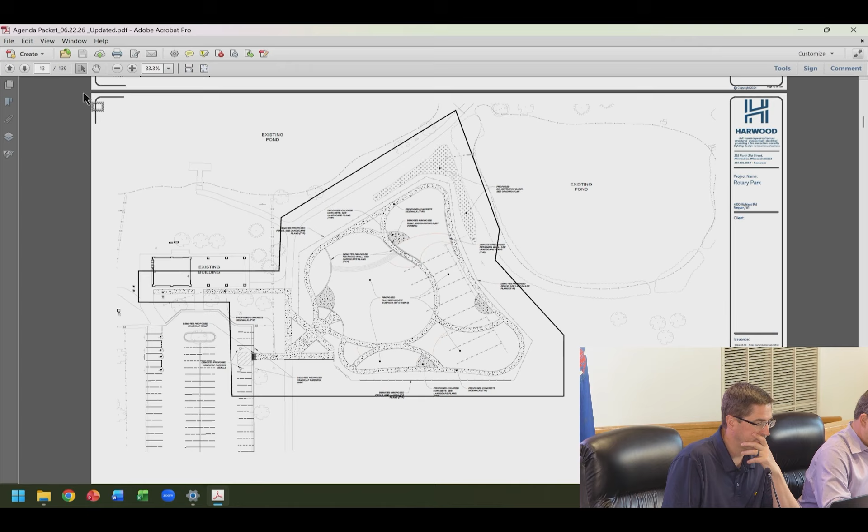Quick update from staff on what this item is about. This request is for conditional use grant and building and site plan approval to allow for an all-inclusive playground within Rotary Park. Our review specifically focuses on site design, overall circulation, and compatibility with the existing surrounding park features. The facility is designed around a central play structure, with surrounding accessible play elements throughout the site. There's also additional site improvements, including perimeter fencing, proposed at 6 feet in height, constructed of aluminum material, black in color. Staff is supportive of this and thinks it complements the site and design well.

The tallest play structure is 12 feet in height, consistent with other elements of the existing park environment. There are also slight improvements planned to the existing pavilion building, including renovating the men's and women's restroom facilities and adding a concessions area, all staying within the existing footprint. There's also a landscaping plan set forth, which staff is supportive of.

It should help soften the transition into the play equipment and the additional hardscaping planned with this project. The applicant was asked to revise the landscaping plan to show evergreen trees installed at a minimum height of 7 feet, and deciduous trees installed at a minimum caliper of 2.5 inches. That's standard for most of our landscaping plans. There will also be a future master sign plan that'll come forward for this project, which will be approved through the Planning Commission at a later date for donor recognition elements and other naming features throughout the playground. With all of that in mind, staff is recommending approval of the playground and the conditional use and building and site plan amendment.

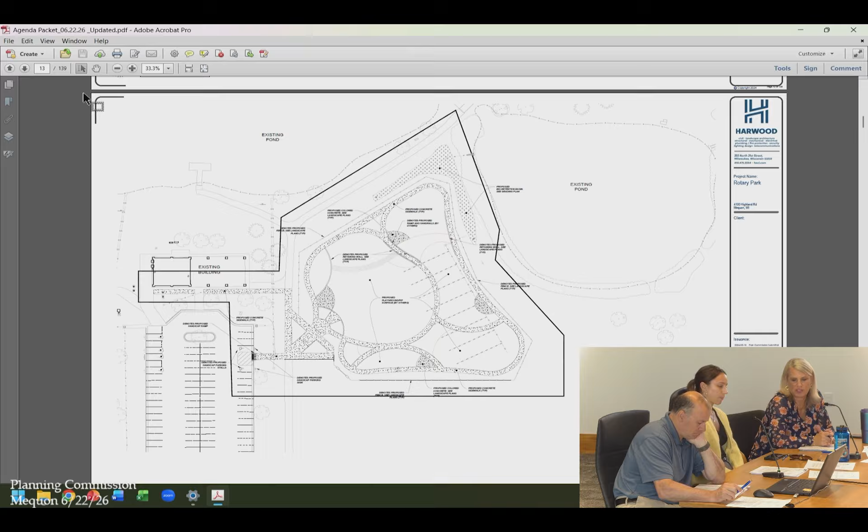Thank you. Any questions from any of the commissioners? Commissioner Barnes: Yeah, just two. I fully support the program. It's great that we have the Rotary here in the city providing these for us. What is, who will be providing the long-term maintenance that you referred to? Staff: I can answer that. It's not really part of this approval, but part of the fundraising effort includes a $500,000 endowment. So the council's already worried about that for us. We're just here to talk about the CUG and the site plan.

And then, as for the site plan, from my past work with Gathering on the Green, I recall several seasons where there was significant standing water in the area - nothing outlandish, but noteworthy. I was looking at the site plan, and it looks like the grading is done, but I want to call that to staff's attention so that when we see the fulfillment and construction of that, the grading aspects are really fully attended to. It's just been a sensitive area I've seen. Any other questions from any of the commissioners?

It's a wonderful plan. This is another step in a long process to get the project put through.

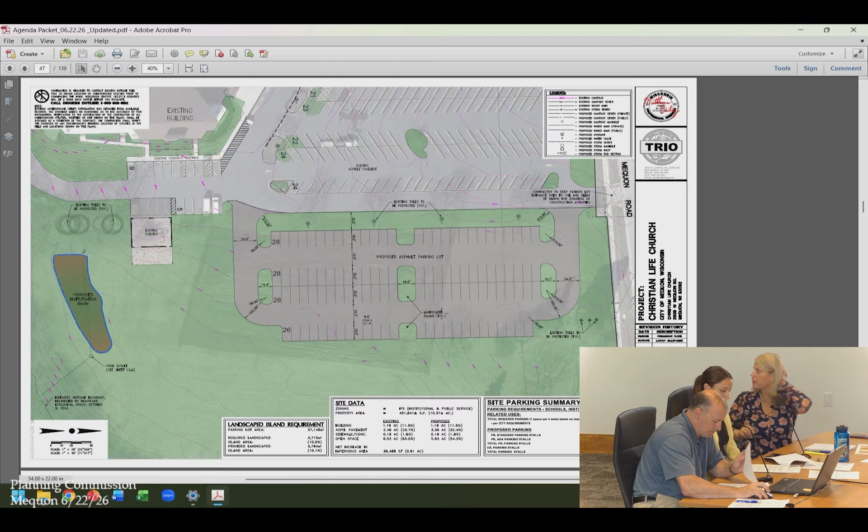All right, any questions from commissioners? Commissioner Schaefer: Can we talk about, kind of to the residents' point, can we talk about the landscaping plan? Because I think there are trees that are planned along Mequon Road. Yeah, I'll pull up the plan for you in a second here.

I had the same reaction where I thought, gosh, every time I drive by there—I admittedly do not drive by there regularly on Sunday morning and Wednesday evening—but there's always ample parking. However, I don't know that it's in my purview to say, no, you don't need this parking if they think they do, but I do agree that screening it appropriately seems like a reasonable ask.

So I do have the plan up on the screen. This is Mequon Road, and this is the existing parking lot. So this is all the landscaping along Mequon Road, and then it wraps around to the east and wraps the parking lot. I think there's a pretty good landscaping buffer there, and the house is still pretty far away from this parking lot. I'll also mention that there's no illumination proposed for the parking lot at this time, so there'll be no lights out there.

So the only lights you'll probably get is some headlights, but the landscaping over time should address any of those issues. And there's not landscaping along, or not much along the existing parking lot, so this would be more dense than what is out there now. Okay, thank you.

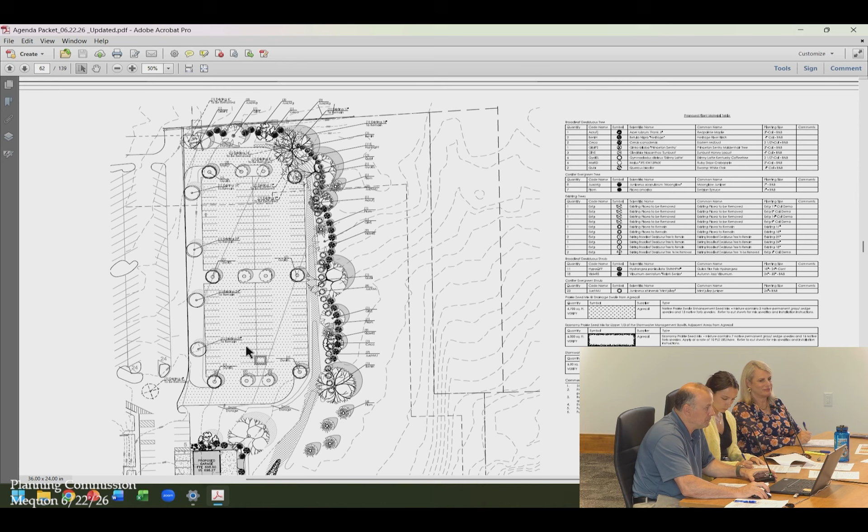Any other questions from the commissioners? Commissioner Chorn: I guess I have to admit too that the times I've driven past, there's so many open parking spots, but typically a parking lot for a church is often sized for the Christmas, the Easter, that event. So I guess I'd like to hear from the church what their thoughts and comments are with regards to the parking situation.

Go right ahead. My name is Ian Whitney, I'm with Groth Design Group Architects, working with Christian Life Church. Just a little context that maybe not everyone's aware of: there's a previous submittal. I think we were here about a year ago to approve the larger addition in the back of their existing building, which is kind of the impetus for this extra parking, since the seating count on a Sunday morning is dramatically increased. This was presented as part of that submittal a year ago as future parking. The church has just determined that they needed to attack this sooner than later.

Thank you for allowing me to be here tonight. I'm the lead pastor, my name is Joe Hanthorne, and our church did undertake the process. My name is Joe Hanthorne, I'm the lead pastor at Christian Life Church. It was about a year ago that we moved forward with this construction project.

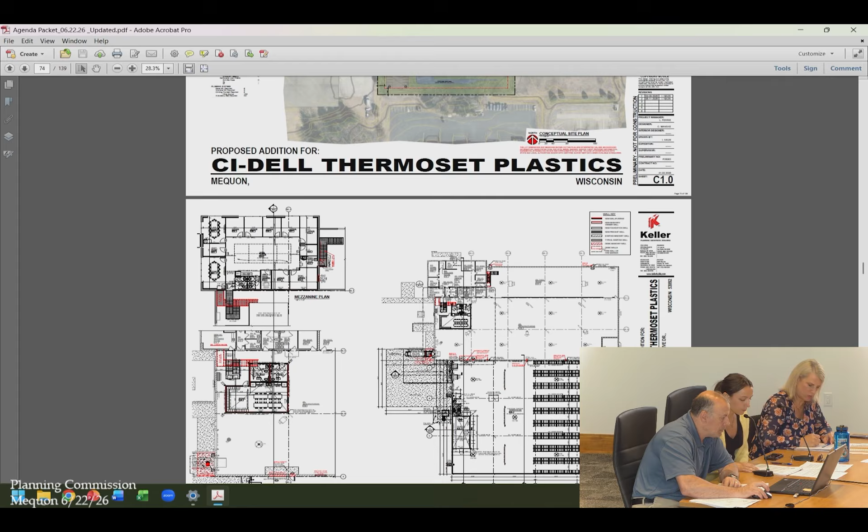This request is for a building and site plan amendment, intended to facilitate the growth of Ci-Dell Plastics' operations. The Planning Commission approved a similar site plan amendment back in 2023, solely for parking lot expansion—it didn't include the building expansion. Those improvements were approved at the time but were never constructed, and these plans now reflect the updated operational needs of the facility.

The site plan amendment includes a roughly 9,000 square foot expansion of the parking area and a 27,550 square foot addition. This is intended to accommodate the anticipated increase in employment—specifically, it should allow for 25 new employees, that's 5 office employees and 20 manufacturing employees across the shift schedule.

This plan proposes 26 additional parking stalls, which is 10 less than the 2023 approval that proposed 36. Despite that reduction, the supply will continue to serve the maximum staffing on site and similarly complies with zoning requirements. In terms of building design, the architectural materials and overall design are intended to complement the existing building and facility.

There are some improvements planned for the existing building as well, including re-roofing, re-caulking, paint finishes, etc. The applicant is also proposing to relocate a process chiller condensing unit from a ground-mounted location to the roof, as well as a new dust collector to be placed on a 15 by 15 slab to the west of the building addition and south of the existing building.

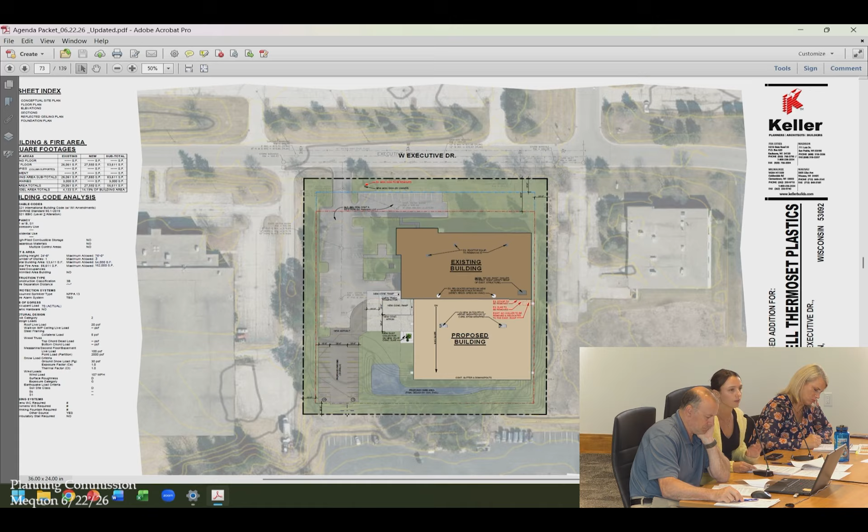There are 13 wall-mounted light fixtures proposed and 7 new parking lot light fixtures. One of the conditions within the staff report, condition 5, asked that the photometric plan be corrected to show property line illumination compliance. They have since sent an updated plan and show compliance with that, so that takes care of condition 5 as noted in the report.

In terms of site compliance, there's one existing parking lot light fixture that seems to be angled upward slightly, so staff is asking that it be corrected to angle downward and correct any spillover or glare onto other properties. With all of that in mind, staff is recommending approval of the building and site plan amendment.

Thank you. First of all, let me say I'm happy and excited that your business is doing well enough that you're willing to expand and reinvest in Mequon, so congratulations.

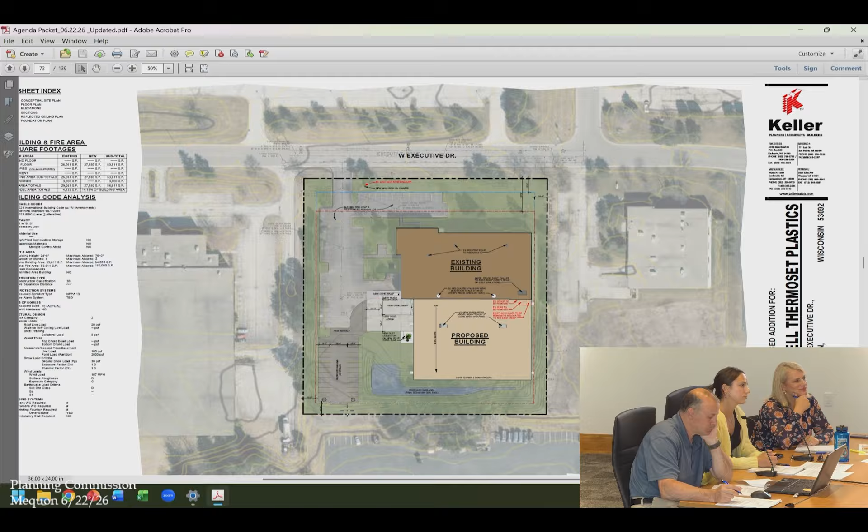Now with that out of the way, any questions from the commissioners, or a motion? I think they've done a good job of matching the proposed building to the existing, so I move for approval based on staff's comments. I'll second. Motion and a second.

Alderman Parrish: I agree, I'm going to be voting in favor of this. Are you in favor of all 12 conditions? Do these all work for you that are recommended as part of this motion? I'm Logan Ferry, here on behalf of Keller, here with Keller on behalf of Seidel.

Conditions 1, 2, 3, 7, 10, 11, and 12 seem acceptable. The line of sight exhibit we've already submitted, so we look forward to speaking further on that. Conditions 5 and 6 should be addressed. For number 8, we'll work with the civil engineer on the private hydrant. And number 9 is already in for review with MMSD, so no major concerns on our end.

Let's go. A motion, a second, and a third. Any other comments or questions? Hearing and seeing none, all those in favor please say aye. Aye. Aye. Any opposed? That item is approved. Thank you, congratulations.

Next is Thompson Project Management for FT Plaza LLC. The applicant is seeking a building and site plan approval for a 3-story mixed-use office building for the property located at 11030 North Weston Drive, Foxtown Building E3.

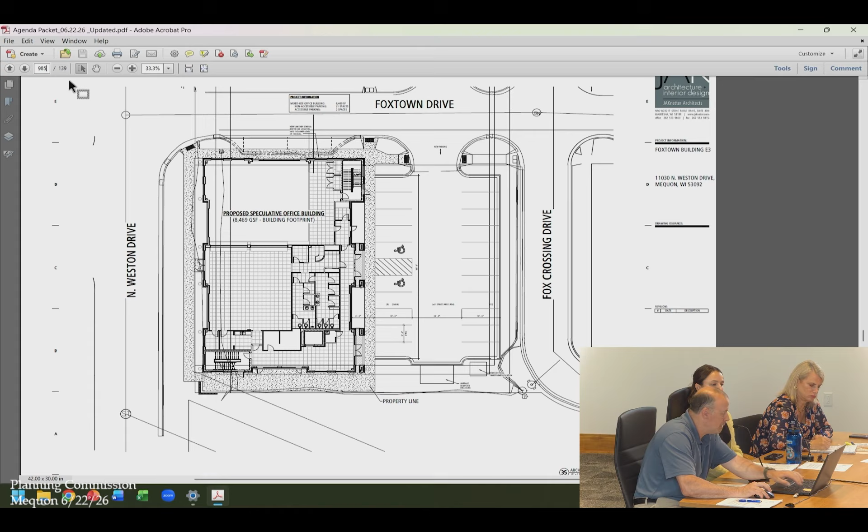In terms of the building changes, there are a couple of minor changes. I'll pull up the elevations on the screen. Let's see, let's just go down. There's a couple changes related to...

The pickleball court is no longer a viable option, it sounds like, so they're changing the floor plan to allow for a dance studio and a fitness center. Based on that, they need to add 2 egress doors, which will be on the north side of the building.

There are also changes made to the greenhouse—if you recall, there was a greenhouse shown on the 4th floor. That has been eliminated due to code issues related to structural concerns with the building. So they eliminated the greenhouse, which actually reduces the overall height of the building by roughly 6 feet. They also eliminated elevator access to the top floors, but there is stairway access.

So you can kind of see on the plan, there's 2 gabled stairway enclosures that go up to the roof of the building. So that's a minor change as well.

Overall, staff is supportive of all these changes. They're relatively minor in nature. We did make a note that dance studios are limited to 2,000 square feet and sports fitness studios are limited to 3,000 square feet. Right now, it shows that the dance studio is a little bit above that, so they either have to reduce that or ask for a text amendment to increase the size if they wanted to go forward with a larger studio. So relatively minor stuff, and we're recommending approval according to the conditions in the report.

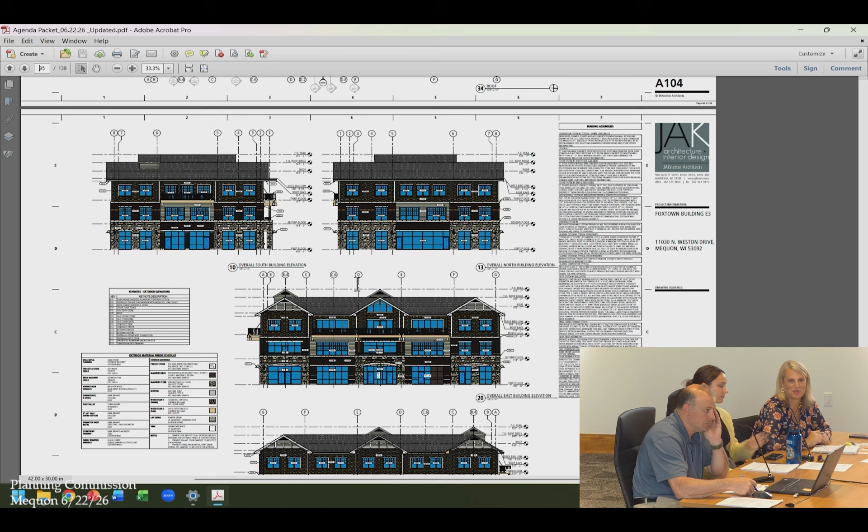Thank you for the overview, Jack. Any questions from the commissioners? Another great looking building in the Foxtown development. Any questions, concerns, comments?

Commissioner Jordan: I have to compliment you again. Every one of those buildings is well done. The materials are great, the look is great, construction is great. So I have no issues with this. I'm glad Jack pointed out those 2 extensions for the stair tower. I was struggling to find out where that was, but I now realize why they are there.

I'm moving for approval based on staff's comments. I will second that. Motion and a second. Any more comments? Hearing and seeing none, let's call the roll just to mix it up, keep staff on their toes.

Commissioner Barnes, yes. Commissioner Chorin, aye. Commissioner Abadi, aye. Commissioner Schaefer, aye. Alderman Parrish, aye. Mayor Nurbin, aye. Vote passes. Congratulations, looking forward to seeing it go in.

Thank you very much. And now we're on to our last item this evening. Miller Marriott Construction. No, did I skip one? Oh, I really want this meeting to be done, I guess. Okay, thanks for keeping me honest, Commissioner Schaefer.

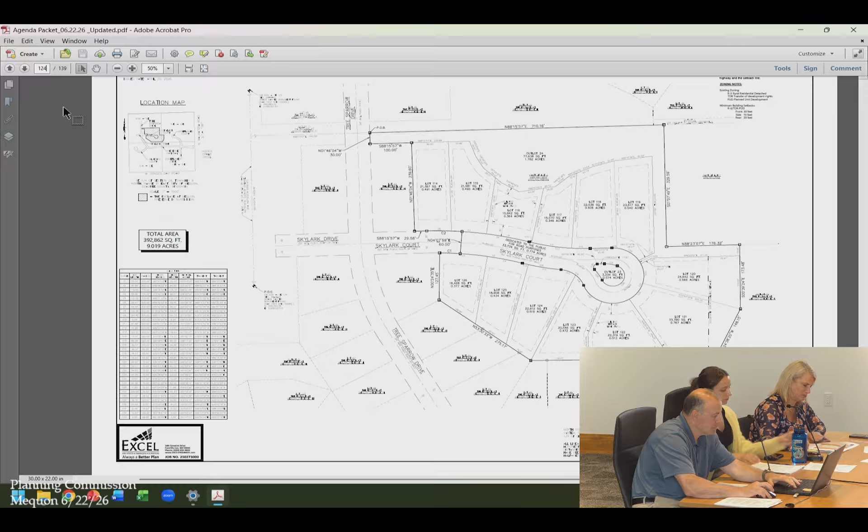Thank you. Any questions from any of the commissioners? Well, if there's no questions, we can always make a motion. I would move approval as per staff's conditions. Second. Motion and a second. Fantastic, last chance on comments and questions. Hearing and seeing none, all those in favor, please say aye. Aye. Any opposed? That too is approved.

Congratulations. Now for our last item this evening. Wait, is that the final? Is this the end? No, it's not the end. No, all right, see you. It just looks like it, because this area, you're putting that one puzzle piece in, but there's other puzzle pieces. Okay. More to follow, I'm sure.

Last item this evening, Miller Marriott Construction Company LLC. The applicant is seeking concept plan and rezoning recommendation approval from B5, R1, R2B, C2, OA to R4 PUD and C2 zoning for a residential neighborhood consisting of 87 single-family lots on 107 acres, for the property located just south of 10303 Baehr Road and north and west of 10007 Baehr Road.

We have two people who registered to speak, so before we go into staff, maybe there's a couple more. Okay, sounds good. The first is Mark Hilgendorf, who opposes and wishes to speak. 11521 West Mequon Road. Yes, I also own the land south of that project, a farm.

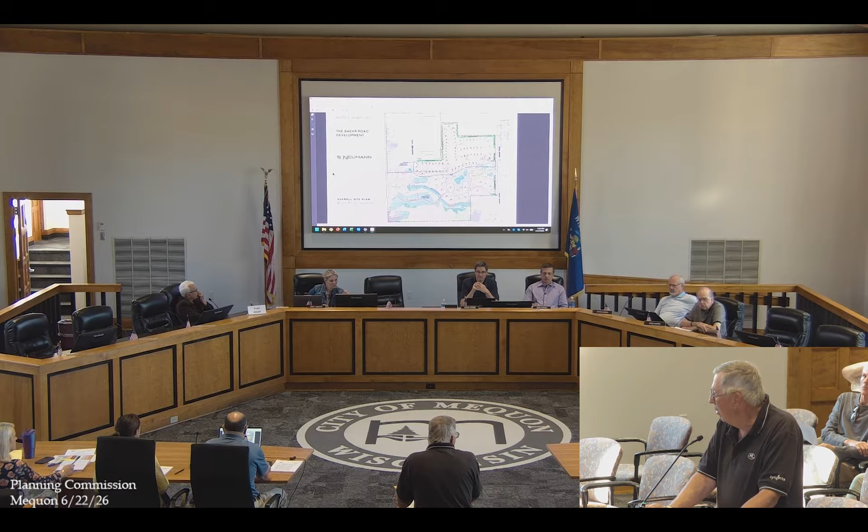If you keep the same elevation that it is now, those houses will be underwater, unless you're gonna put it on somebody else's property, which I'm sure they don't care about because they're in and out anyway—they're not residents. So, thank you.

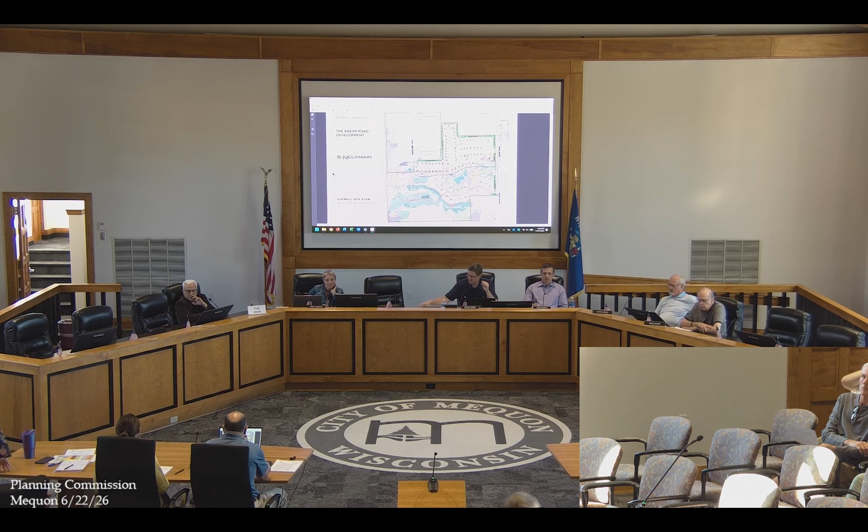10258 North Baehr Road. My property is just to the east of this proposal, and I bought the property because of the rural nature of the road. When somebody asks where do you live, and I say Mequon, but not the subdivision Mequon, rural Mequon, that is very important to me. We pay a cost for living on a rural road—we have our own well, our own septic, and we've done that. I've been there 25 years now.

That's fine, I appreciate it. I think Mequon has enough subdivisions, and I have not seen this plan before, but it looks like if you wanted to put houses to the west but leave Baehr Road basically as it is, that would enhance the city of Mequon. That's my view.

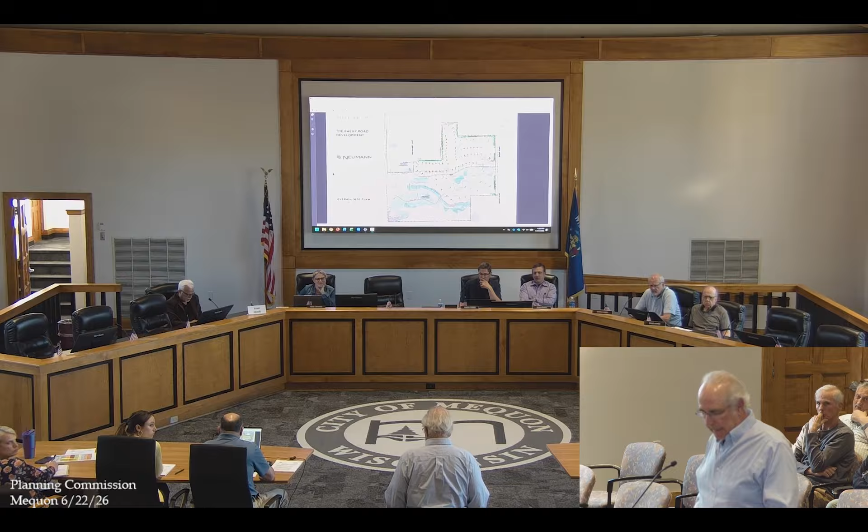Back in the late 90s, there were a series of meetings held. There was a subcommittee to explore the stormwater issues as well as the uses of the property. Most of the neighbors, virtually all of the neighbors along Baehr Road at that time in the late 90s, expressed an interest that the property would not be developed for industrial, and it would be used for residential.

If you want this as part of the record, I'm sure there's records of that at City Hall. Also, maybe Jack Zader could address this, but a lot of the water is coming from when we get the plus 100-year floods from the Milwaukee River. But the neighbors were talking about the ponds overflowing. The ponds on the property are pretty much midway down Baehr Road. Those are temporary structures, built when we were doing some grading, prepping the site for sediment basins for the construction activity. That was not a permanent solution. It was not designed for the eventual, ultimate use of the property. So I want to point that out. Also, there's some inadequate culverts that back up the water.

Recently, last summer, the city did improve Baehr Road. That elevation probably took up the road grade a little bit, and that should help with some of the water draining, but also with the improvements, I'll have Miller Marriott and Neumann address their plans. So again, as a resident, I support this development, but we also have a vested interest in Mequon. I've lived here virtually all my life. I have brothers and sisters who are also property owners in support of this. Appreciate your consideration. Thank you.

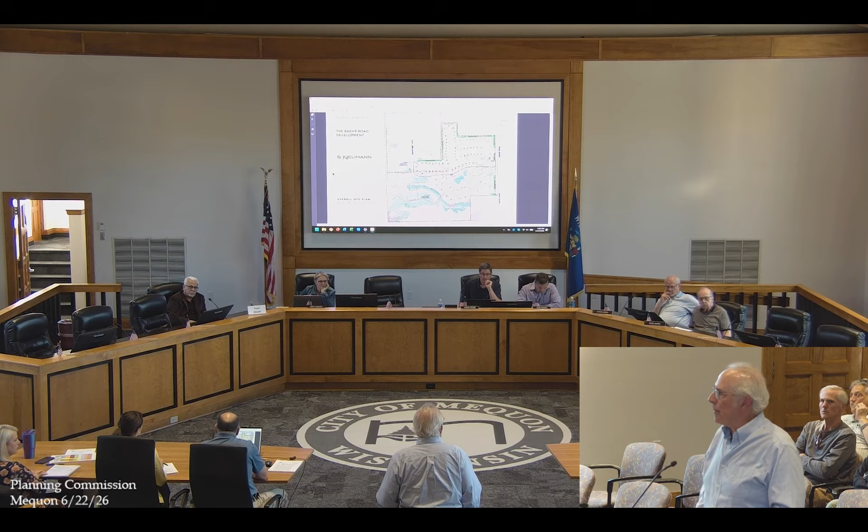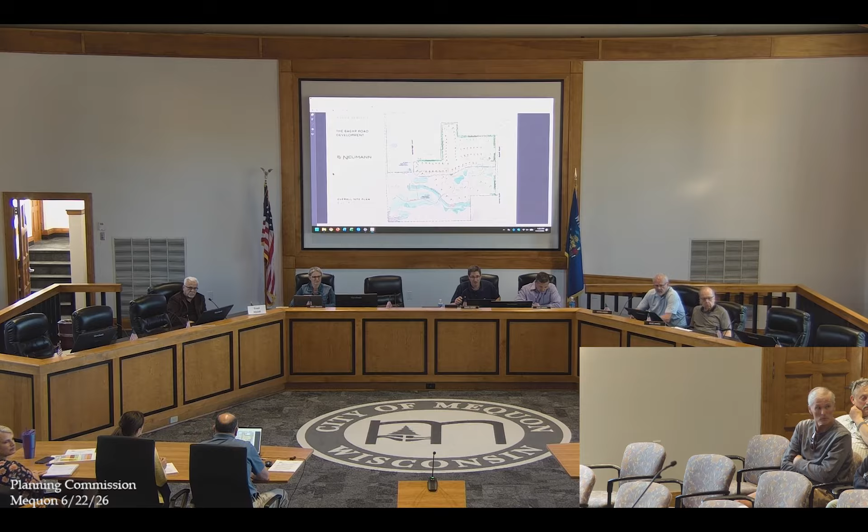Thank you. Is there anyone else here who wishes to speak while we're entertaining public comment? One more comment? I think she spoke already. I did. Okay, we usually say one and done, but if we keep it quick, let's have it. Please step up to the mic though, so it's recorded.

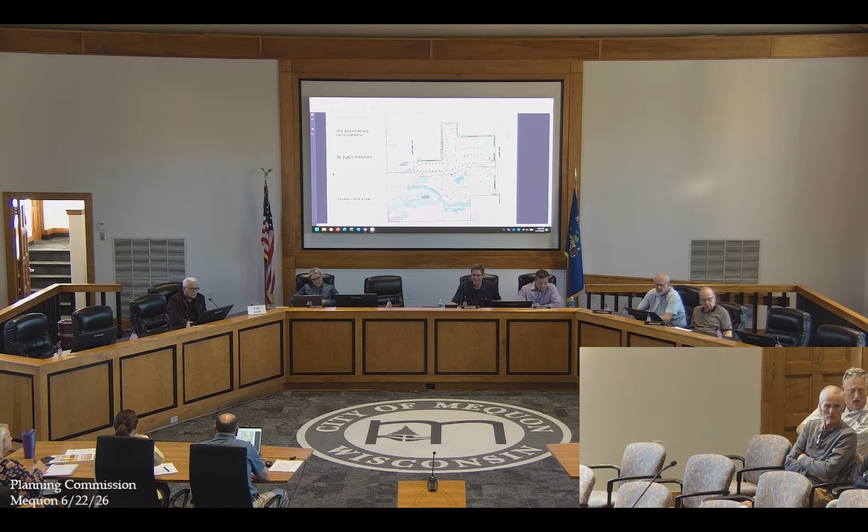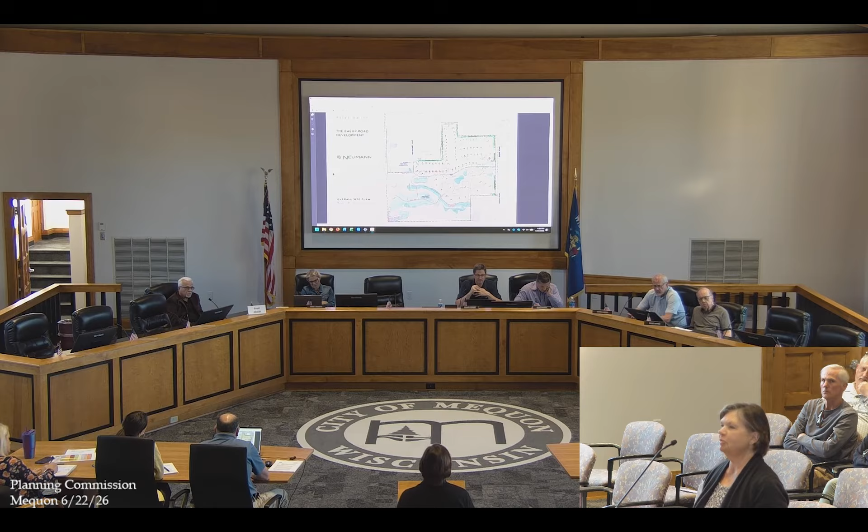It's the number of trees that will have to be cut down, bulldozed. There are trees here. You should see all the beautiful mature trees in that area. It's a crime.

All right, I think we're done with public comment now. I don't see anyone raise their hand. Okay, let's get into the staff report, and then we'll open up for questions.

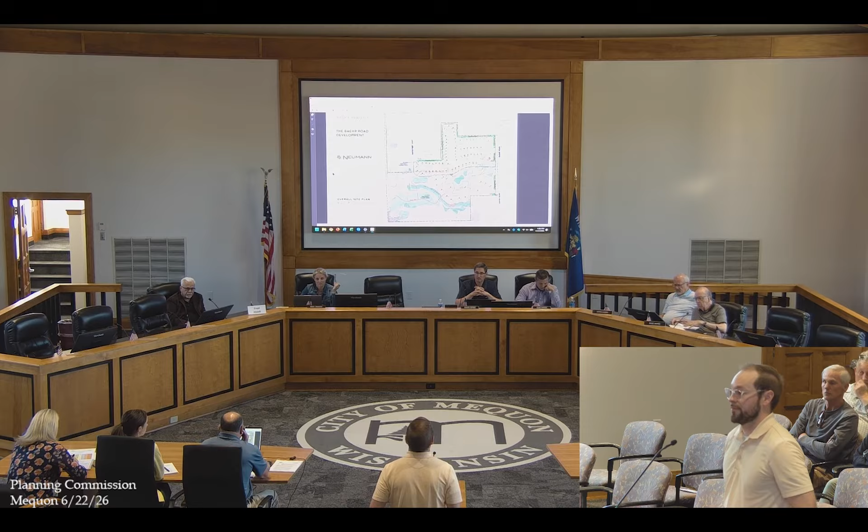Sure, I'll let Cole address any specifics to the drainage, but I guess I'll start off by saying this is, in its simplest terms, a question of whether it should be industrial use or residential use. Most of this is currently zoned B5 industrial. So it's not a matter of getting it developed, it's a matter of what type of development we want to see here. We've been dealing with this, I've been here 20 years.

I've dealt with numerous proposals that Tom talked about on the site, mostly residential, some non-residential, but it's a tough site, and there's a number of reasons why. Number one, it's currently served largely by a private lift station that goes down Enterprise Drive. Another issue is that the southern half of this is not in the sewer area, while the north half is. So it's bifurcated by the sewers. There's also, as people mentioned, wetlands, floodplain, and some specimen trees on the site. There's a lot of environmental issues on the site as well.

So the question the commission has to respond to is: is it more likely to be developed, or better developed, as residential or industrial? Because whether it's industrial or residential, they all have to meet the same stormwater requirements. Cole can get into that in more detail if you need.

We've had numerous discussions and proposals about this site. Most recently, in March, the same proposal was in front of the Common Council for a consultation. The Common Council overall supported the use of residential, with some qualifiers. 6 out of 9 members supported lots between 10,000 and 13,000 square feet on the north piece. 6 out of 9 voted in favor of the city maintaining that lift station, and 7 out of 9 were in favor of requiring 2 entry points for the subdivision. Currently, the subdivision has 1 entry point for the north piece and 1 for the south piece, with an emergency connection between the two and an emergency connection from the north piece to Enterprise Drive.

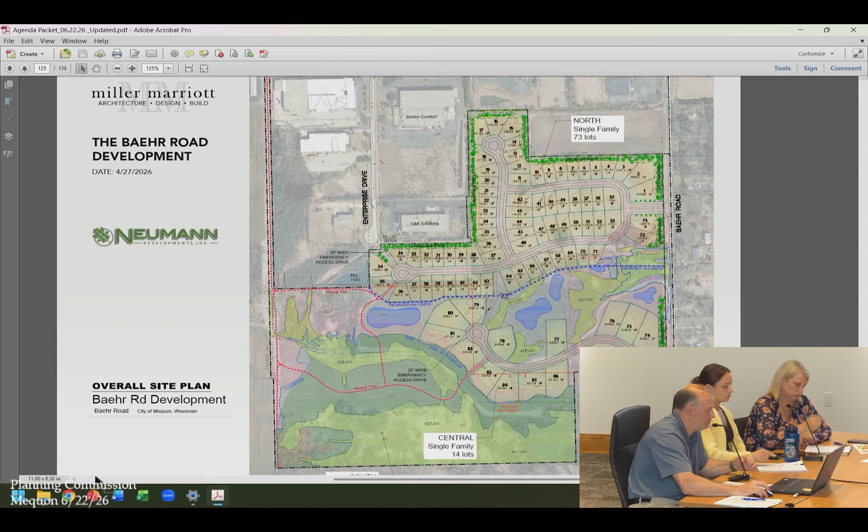Thank you. Thanks, Jack. Do you know offhand if it was developed as industrial, how many square feet would be allowed? No, but I can calculate that relatively quick if you need an estimate, I just have to pull up my map. Maybe Cole would like to address some of the drainage concerns, if the engineers could take that on. Sure, I could go over that quick.

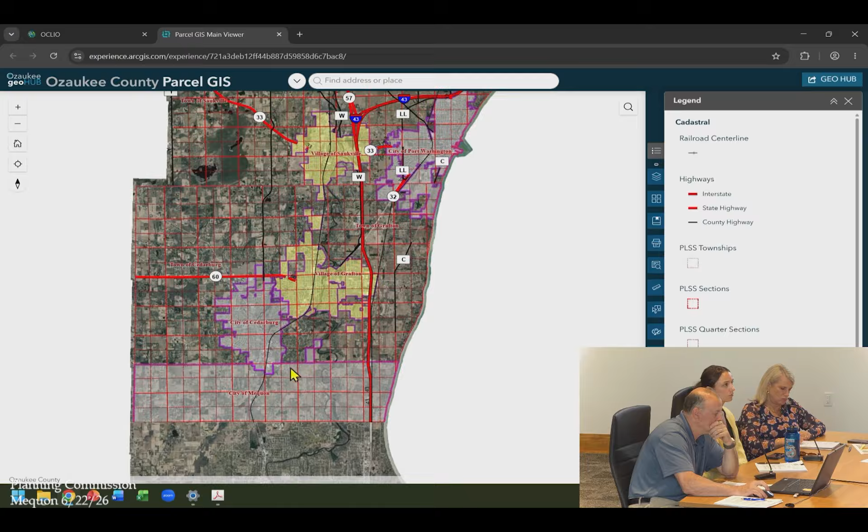A couple easy things. First, there were concerns about endangered resources, whether that's trees or other animals, like bald eagles. DNR will screen for that when the applicant applies for their stormwater and grading permit through the DNR, and they would have to take any mitigation measures for those types of things.

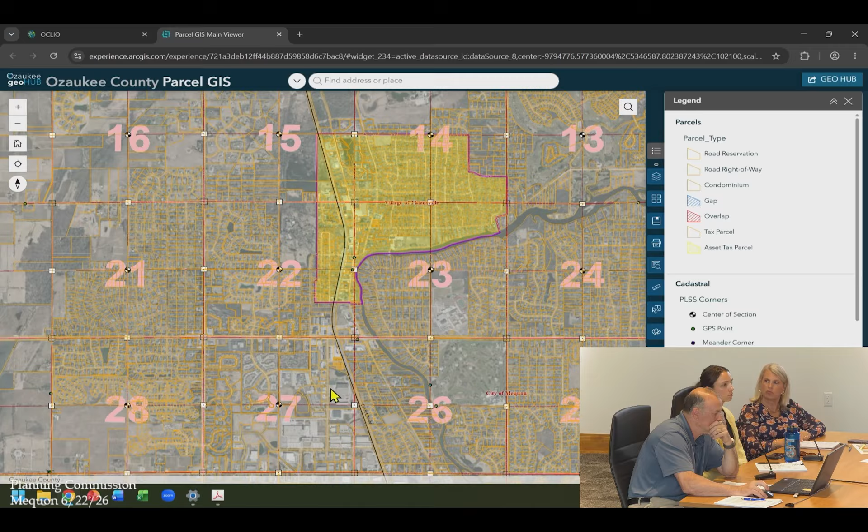There were a couple mentions about floodplain filling. We're not aware of any floodplain filling that's proposed. It's pretty hard to obtain, but we're at least not aware of any at this time, and the maps didn't look like they were proposing any in those areas.

And then regarding stormwater and flooding, we go through this in a lot of developments. We have a couple different levels of regulatory restrictions on stormwater and how it has to be controlled—DNR, MMSD in this area, and our city ordinance. Those all have different regulations, but basically you need to discharge less flow at a lesser rate than what it was before the development occurred.

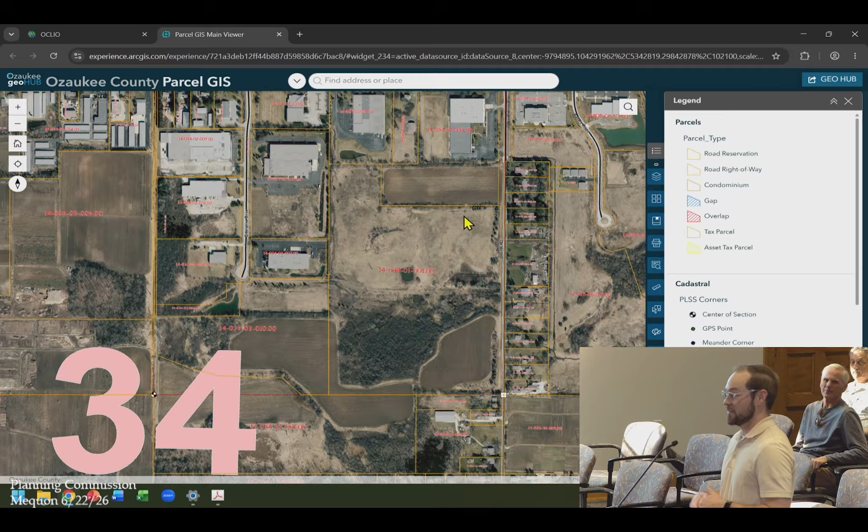That's the reason why these ponds fill up with water when you see rain events. It's obviously the reason when you see big rain events like last August that was mentioned—you'll see overflows, you'll see water in those ponds, because that's where it's supposed to be. It's holding back that water, that volume, and then releasing it slowly over time. The city has a more restrictive stormwater ordinance than both DNR and MMSD; it actually requires the developer to bring the flow rates back to as if this site was basically like a forest. So I just thought I'd add those pieces in, but happy to answer any other questions.

Commissioner Schaefer: Cole, can you go back to the part about trees, wildlife, et cetera? I don't know that I've heard this before. So if the DNR does some sort of screen, and if things are found within whatever scope they have, then what? Can you explain it?

If you're disturbing a certain amount of acreage, you have to do endangered resources screening on your property. That's basically telling DNR where your project is, and they have a database mapped of where endangered resources have been encountered. Depending on what you're encountering, you have to take certain measures—like you might only be able to touch certain trees. One example we encounter on our projects is bats inhabiting certain trees at certain times of the year. Nate would know those dates off the top of his head. There are times you can only take down trees; the dates are restricted to avoid breeding or nesting season. Same with bald eagles—we actually encountered that on one of our projects recently, and had to take certain mitigation measures for that as well.

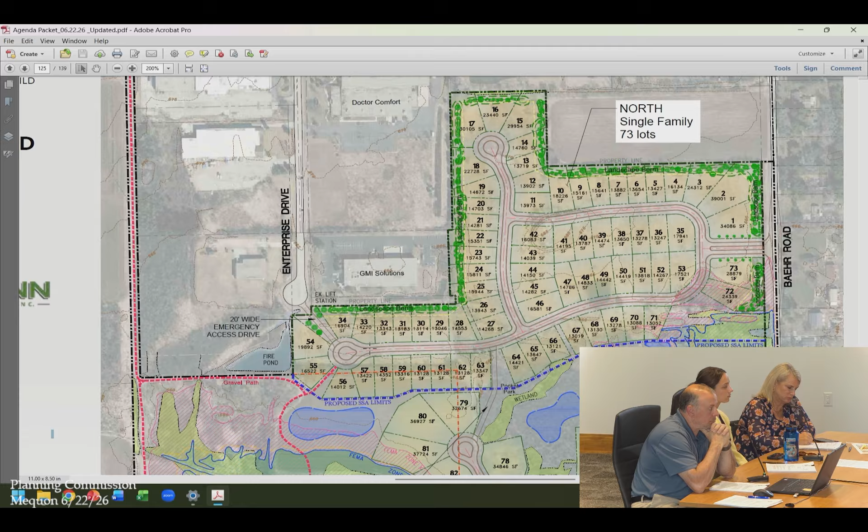Commissioner Abadi: Did I hear this correctly, that the fire department has not seen or commented on access? We invite them to all our meetings. They don't necessarily show up to most of them, so I don't know if they've seen it, but they haven't made any comments on it at this point. It's really not a typical fire department comment time frame for them. If it's built to our specs, it usually isn't an issue. They'll comment more on industrial uses or where there's fire lane requirements. But for residential, if it meets our city requirements in terms of cul-de-sac size and street widths, they normally don't have a concern with that.

No, the issue is only one access to a major road. If you don't have those emergency access points, then potentially the fire department could have issues. Yeah, typically in the past they haven't really made comments on those issues in the years I've been here, so it's a legitimate comment, but we haven't heard it. They'll look particularly close when roads aren't built to standard specs, but standard specs are meant to accommodate the turning movements of the vehicles. You're right about the emergency access, but that's maybe why it's being contemplated. If you had a significant event towards the entrance of the subdivision, you could choke off the whole subdivision very easily.

In communities I've served, the fire department would strongly object to one access point to a major road. Yeah, I mean, I think that makes sense. Typically when I spoke to the fire chief in the past, he says if I need to get there, I'll get there some way or another. But the northern piece will also have hydrants at certain locations. So again, our recommendation is to have two full access points, either a connection between the two or two off Baehr Road. So I think even if they don't support it, we're supporting it in terms of connectivity and development.

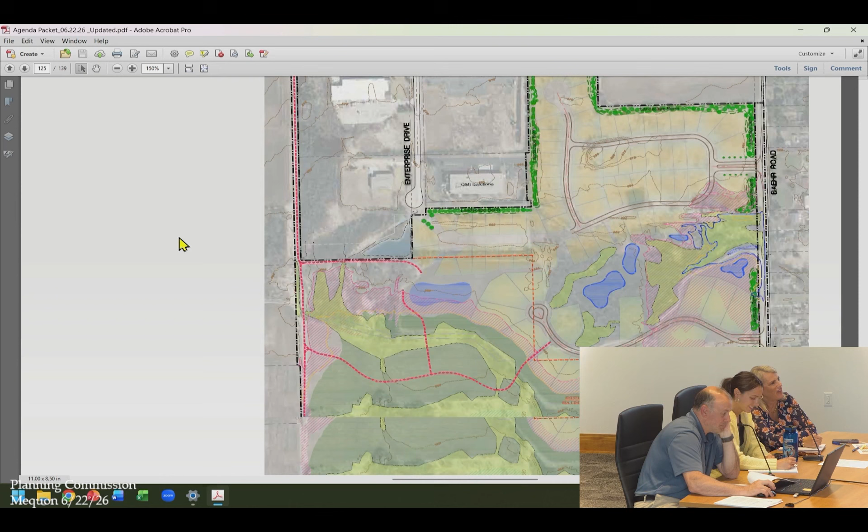Every time I zoom in it jumps to a previous page for some reason, I'm not sure why. But yeah, it's just really close, and you know those residents are going to start complaining about the truck traffic and the lights -- it's just so predictable what will happen. So let's just design an extra buffer there. There should definitely be another 10 to 20 feet of some kind. I like the landscaping and the trees buffer that you have there.

Honestly, if you have an exit proposed on Enterprise Drive, I'll vehemently oppose it. Council, think about land use, think about home values. I'm not speaking to anyone directly, just hypothetically—someone living in lot 34 doesn't want a business park road going right past their house into a nice subdivision. It doesn't make any sense.

So the solution there is just to connect them. That's what it needs to be when you come back. But in general, I think the ship has sailed—we need to help them get some density here to make it viable.

Other developments proposed here over the years were dense, multifamily, and other mixed uses, like some form of senior housing and townhomes. Out of all the plans I've seen over the years, thank you to the property owner and both developers for trying to make this work. I get you're trying to keep the development separate, but we're working with you, so you've got to work with us. We want something to happen here. We're bringing a whole other section of Mequon Industrial online, so this can happen, and we expect some level of compromise, respectfully.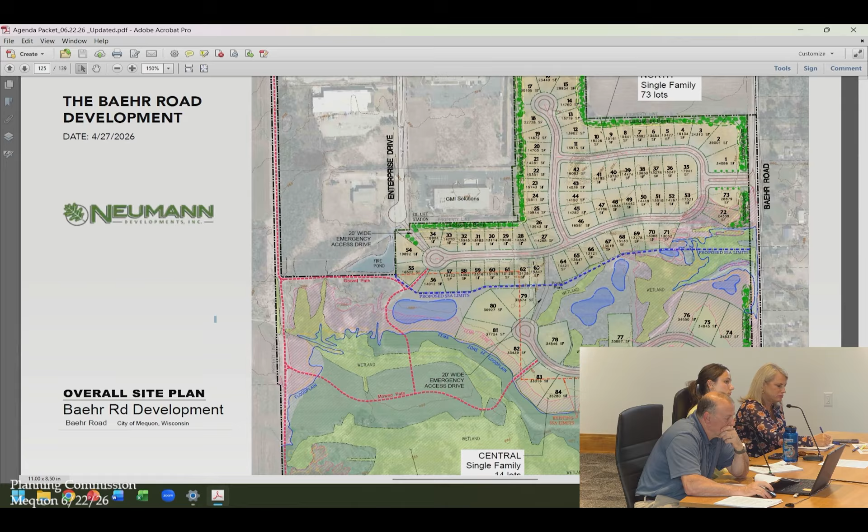There's just a lot of trade-offs. It's a hard site with all the protected features, and if we're going to help make this work, I get we need some compromise here. Thank you again for all the time and effort, and if you have anything to add for our consideration, we'd love to hear it as well. Thank you.

I don't see any other questions from the mayor. Would you like me to talk, or do you? The applicant wants to have a few words. It's certainly appropriate to do so.

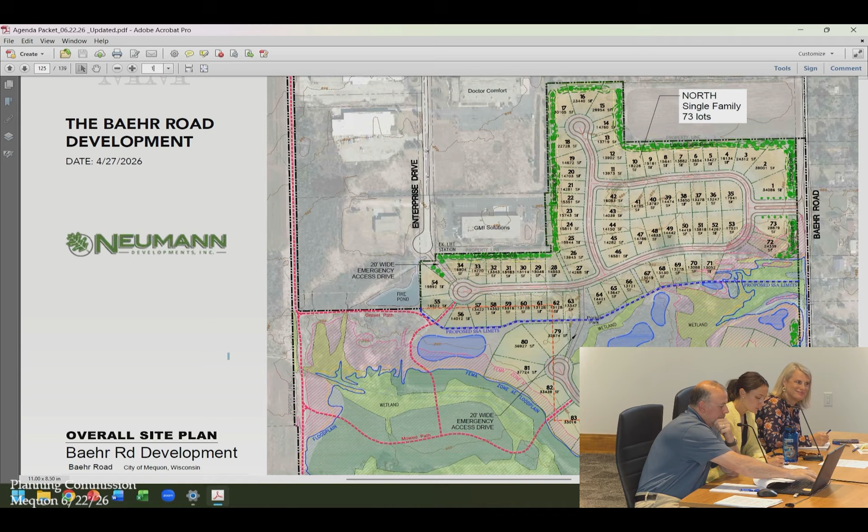I'm Chris Miller with Miller Marriott Construction. Brian Lindgren, Neumann Developments. I'll speak a little bit conceptually on the whole thing and talk about the southern portion, which is really where our eyeball's at, meaning that's where we're looking to build our homes. I'll let Brian address some of the northern stuff.

I want the Plan Commission to understand that I look at this as a development as Miller Marriott. On the northern part, I've asked Neumann to partner with me because it's a better fit for them. But I hear everything that's being said—it's a tricky site. Honestly, it's what we do at Miller Marriott.

We do infill subdivisions, so a lot of the conversations in this room—the residents concerned about water, the noise—we've been down this path before, and they're all good concerns that need to be addressed. We will continue to address them with staff as they come up. What we're really asking for is approval conceptually so we can get into those details.

A couple of things I want to talk about: it's next to an industrial park, which makes it tricky. Part of this is having transparency with customers, so as we go down this path, they clearly know what they're buying, and that helps everybody involved. We had a situation doing an infill next to a military academy where, literally in the buy agreement, we had to let them know there can be cannons going off and have them acknowledge it—if you don't want a cannon going off at roll call, this is the wrong subdivision for you. So transparency is everything in stuff like this.

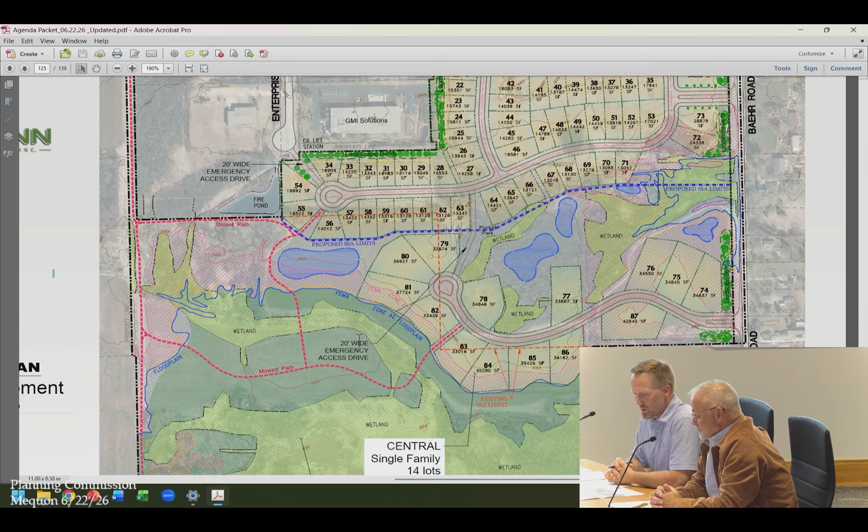In terms of the buffer area, I'm not saying anything I haven't said in this room before, that I don't love the 30-foot buffer. I think there are a lot of ways to address that are appropriate. Landscape and preservation easements can serve the same purpose and give a homeowners association the necessary enforcement mechanism it needs. Even whether it's on an individual lot or not, we can dictate plantings and preservation methods and what happens when it's mistreated, and intervene as necessary.

With that, I think we're looking for some direction. We've heard that the emergency access is not preferred - we can make a permanent connection. I think the rest of the conditions as listed are things that we can work with. But I do want to ask again that you consider that these preservation areas can be done with other methods than putting it in an outlot that frankly isn't really accessible to anybody other than the homeowner that is right there.

I do want to add one thing to what Brian said. I've seen this go both ways. I've seen HOAs actually go defunct, and they're hard to manage, and homeowners are better at this because they care about their own lot. It could be done via easement - the 30-foot buffer could be done with an easement, and they have to maintain it a certain way. Homeowners are going to make that happen. I've also seen homeowners go a little rogue, and HOAs have to step in.

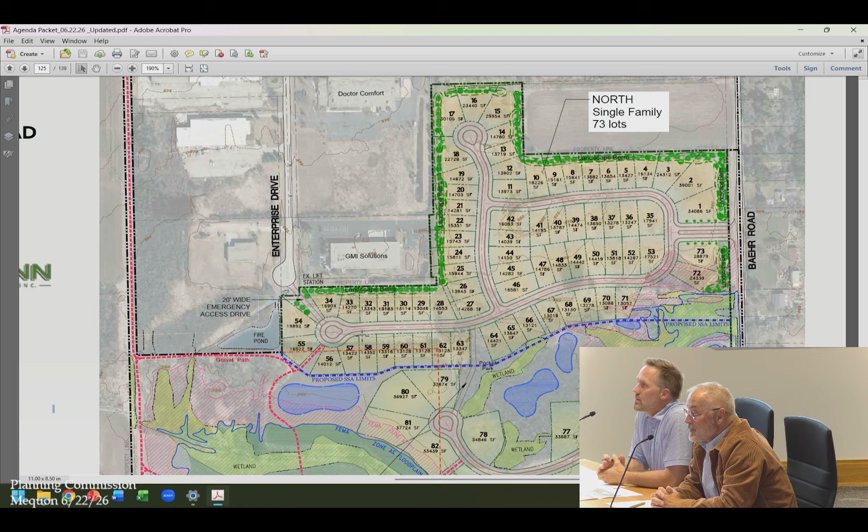What I mean is, I'm okay with both of these developments. I'm okay with rezoning it based on what I'm seeing here, generally speaking, and the developers we have. But say one of these developers is no longer part of this proposed development, gets swapped out, or the deal doesn't happen, and an all-new developer gets brought in. I rezoned it because of what I'm seeing here. So do we need to modify the language so the rezone is contingent on the development actually happening?

Are you saying you prefer the concept plan or you prefer the developer? That's two different questions. Because if it's just a concept plan, I'm worried about rezoning the property — one of these developers goes away and then it's too late, it's already rezoned. I'd prefer it just stay industrial. So for me it's really important what we're compromising on when we do rezone this.

You could make the rezoning contingent on the proposal. It's already contingent upon the sewer service boundary amendment being approved. You could also make it contingent upon approval of a preliminary plat. That way, at that point, they're pretty much committed to do the project, and if it falls apart, the rezoning doesn't go into effect and it falls back to the industrial zoning.

Okay, thank you for your suggestion. I would just ask that if someone else makes the motion, I'd really appreciate you including that as part of it. You can make the motion — I don't want to stifle conversation. No, well, you don't have to make the motion now, but Commissioner Jordan.

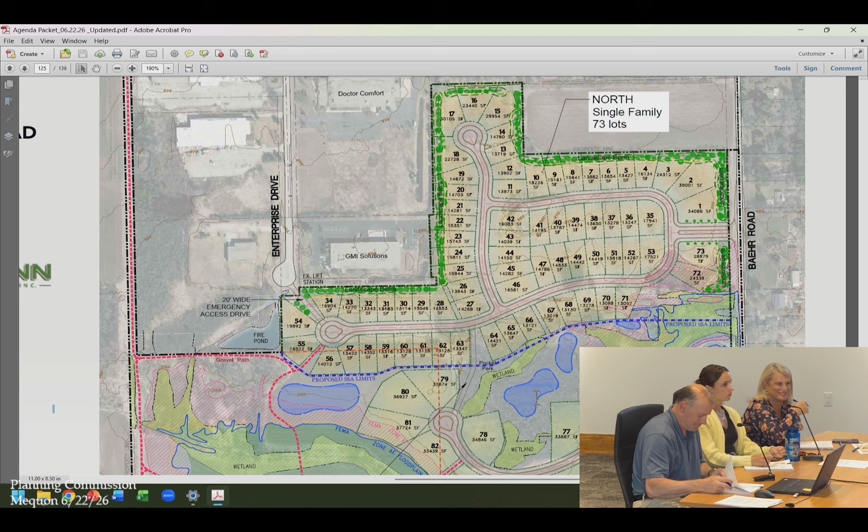I'm trying to leave that out. So was that a motion? Yes. We can always also have a competing motion. No one seconded it yet, and even if they had, we could always have a competing motion. Would you like to make a motion?

Yeah, I'm still trying to understand how we move forward here. But I'd like to mirror my motion to Commissioner Barnes', and reiterate that the rezoning for the concept plan shown today is contingent on the preliminary plat approval.

Oh, you want to add that condition as well? That would be under number 8: rezoning is conditioned upon approval of the sewer service boundary amendment and the preliminary plat. Oh yeah, it's already in there, but it says the opposite of what I'm saying—it says no preliminary shall be applied for, and I'm saying you want the preliminary plat to be in place. I understand what you're getting at there; that could be modified pretty easily.

And it sounds like that's a competing motion—you don't want that as part of it? I misunderstood that part, okay, so we're on the same page—there was something in there already. Okay, will you accept my modification? I would accept that. Okay, then I'd be honored to second your motion. Or he can second your motion. Yeah. Any other discussion?